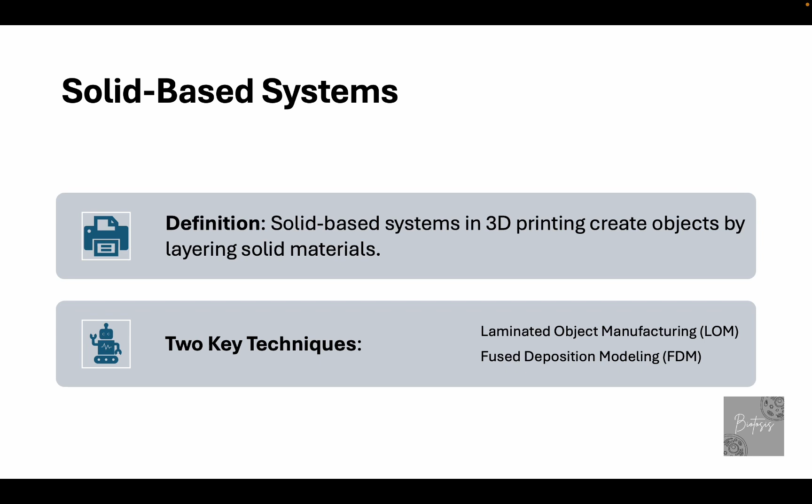Solid based systems in 3D printing create objects by layering solid materials. The two key techniques we're going to talk about today are laminated object manufacturing and fused deposition modeling.

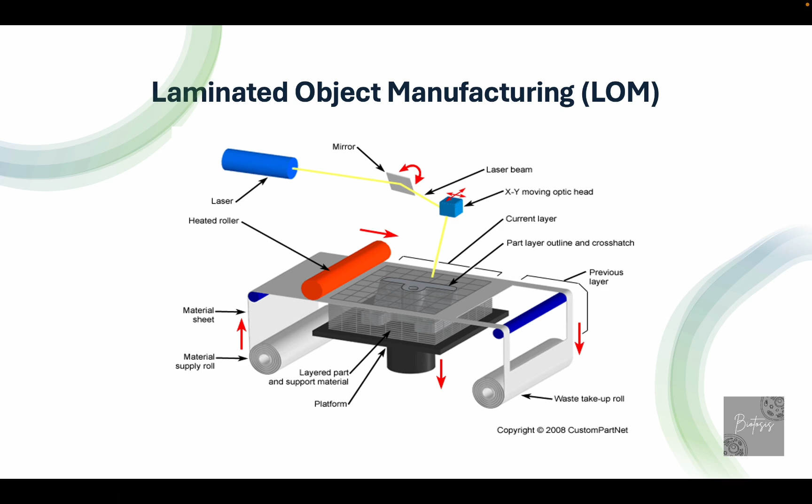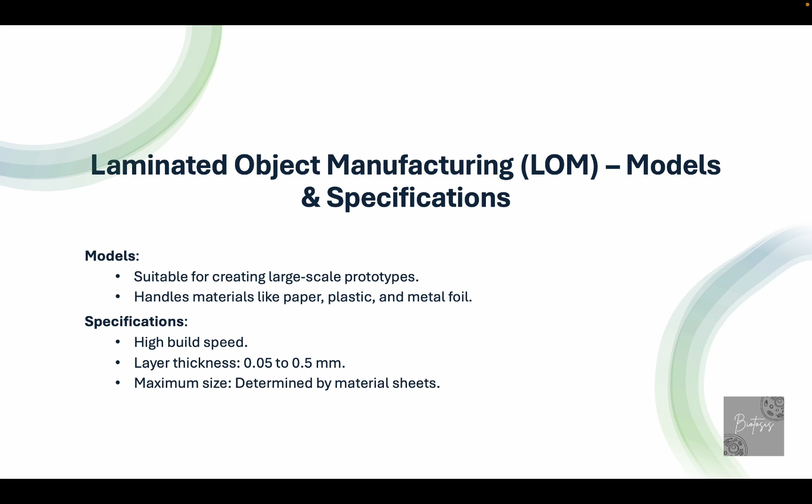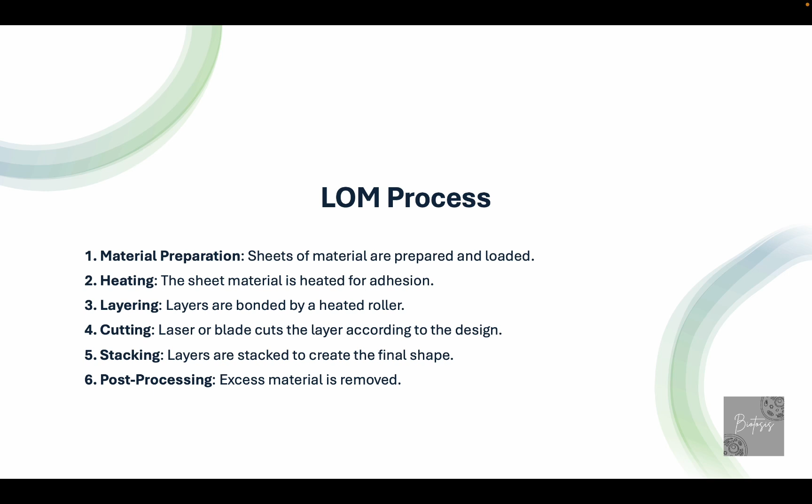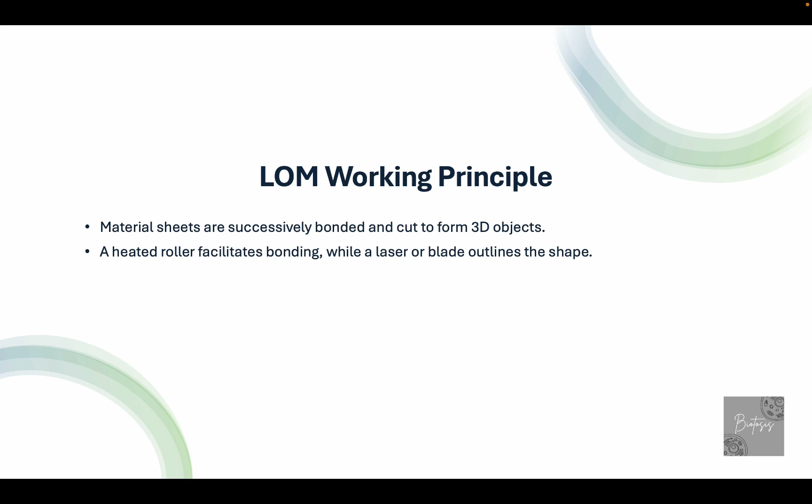After the whole thing is done, post processing is done. The working principle is that materials are successively bonded and cut to form 3D objects. A heated roller facilitates bonding while a laser or blade outlines the shape.

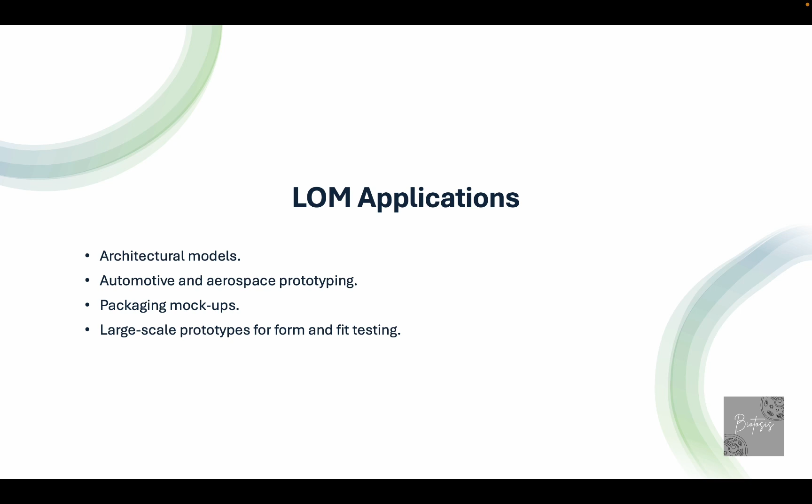What are the applications? Architectural models, automotive and aerospace prototyping, packaging mock-ups, and large-scale prototypes for form and fit testing.

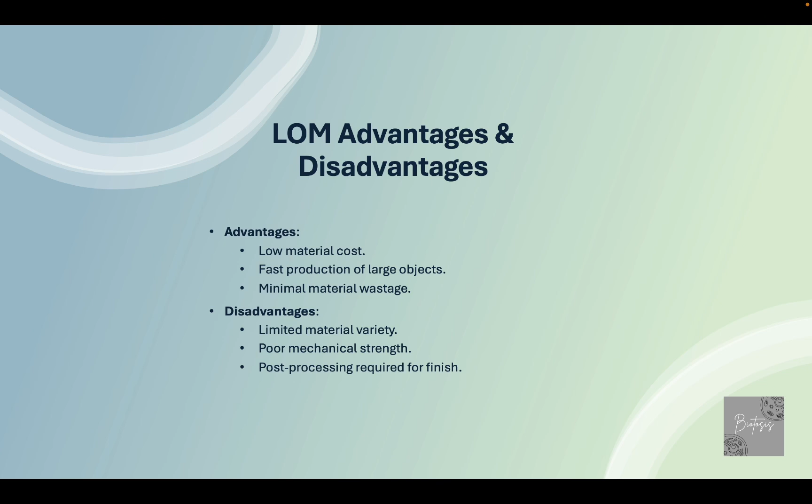The main disadvantages are limited material variety, poor mechanical strength, and post-processing is required to finish the actual product. Otherwise, it has low material cost, fast production of large objects, and minimal material wastage.

Coming to the next technique of today, fused deposition modeling. Here what happens is these rod-like, very tiny solid structures are heated to form a liquid structure, which then turns into a scaffold.

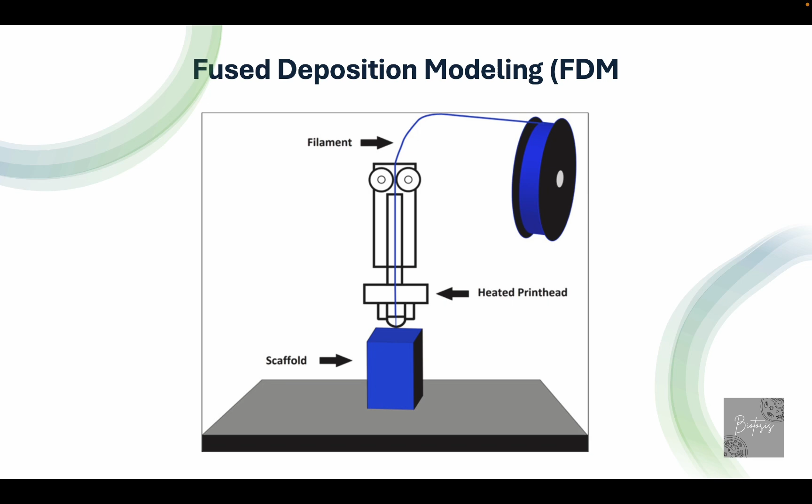So from here, solid strands go, and in the nozzle they come down as liquid. Once that is done, the liquid is prepared according to the model that we have provided to the printer, and it is printed. This is the basic working mechanism of fused deposition modeling.

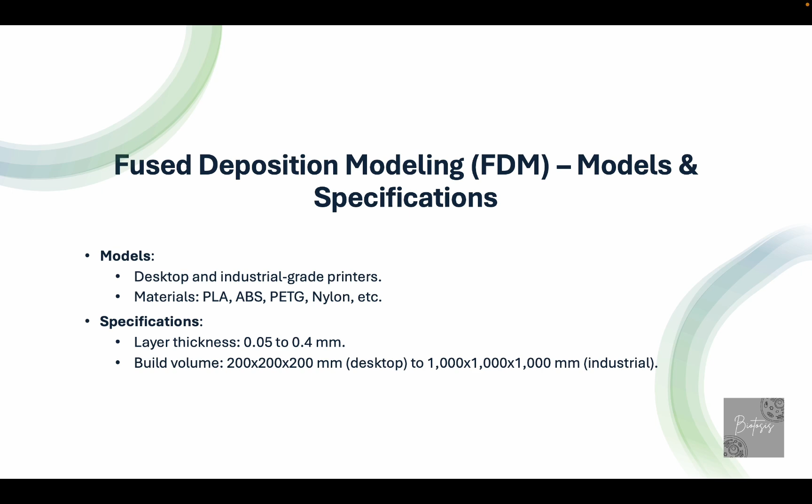Now talking about technicalities, desktop and industrial grade printers are there. The materials used are PLA, ABS, PETG, nylon, etc. Specifications again range 0.05 to 0.4 mm. Build volume you can see and refer - this changes from system to system.

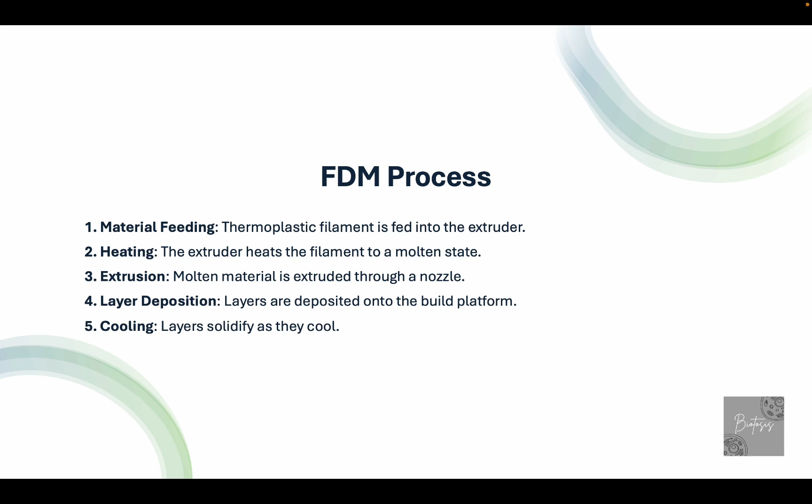Now what is the working process? First we feed the material, which is thermoplastic filament, into the extruder. Heating happens - the extruder heats the filament to a molten state so it can be printed. Extrusion is when the molten material is extruded through a nozzle, and layer deposition is where layers are deposited on the build platform, and cooling happens to let the layers solidify.

The working principle is that FDM uses a heated nozzle to extrude molten material layer by layer, and layers fuse as the material cools, creating a solid 3D object.

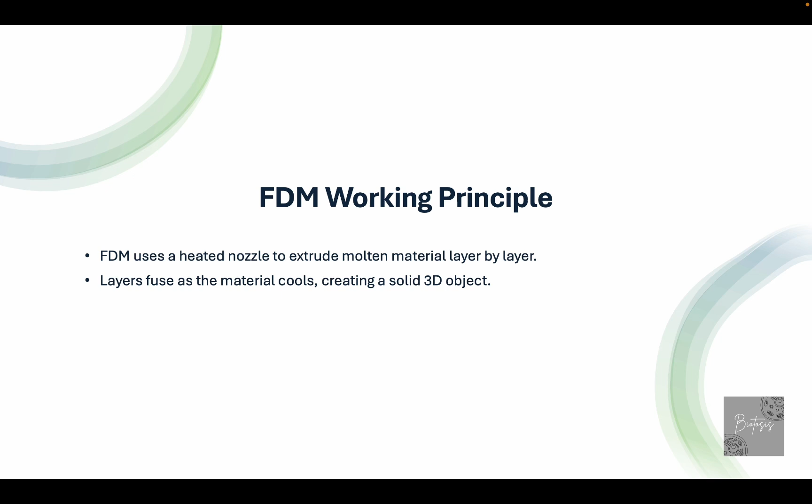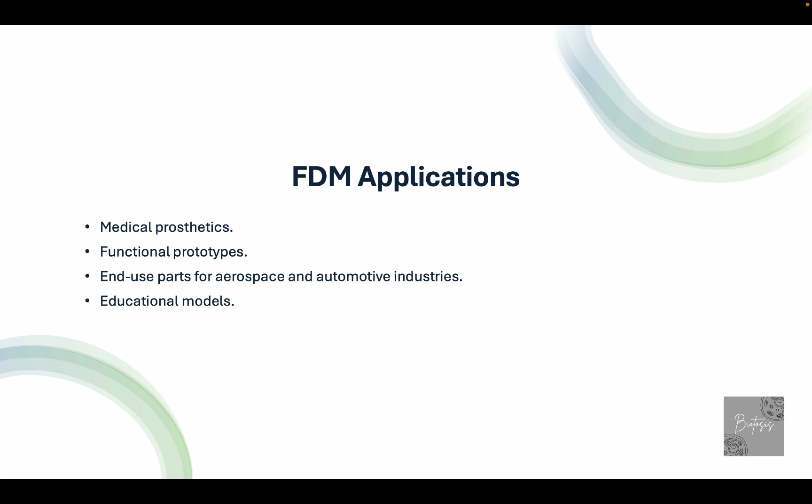The applications of these are medical prosthetics, functional prototypes, end use parts for aerospace and automotive industries. Obviously, educational models are also prepared here.

Basic disadvantages are it's slower for large objects, layer visibility in finished products is not very clear, and there's limited strength compared to other techniques we have already talked about or will talk about later. Although it is very affordable and accessible, compatible with various materials, and has high accuracy for small scale models.